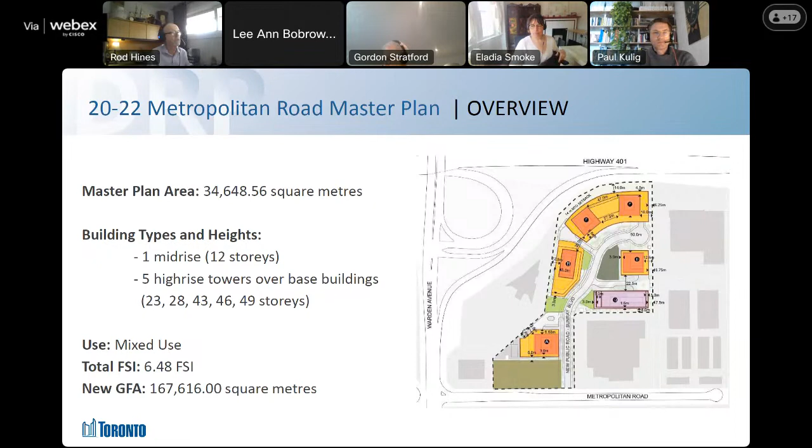The subject site is currently designated mixed-use in the official plan. Next, please.

The subject site is currently designated mixed-use areas. It is the entirety of the red space highlighted on the diagram. It's kind of an unusual context, flanked by general employment areas on the west side and to the south, and core employment areas immediately to the east and southeast.

A little bit of background: we had a prior application, an official plan amendment only application on these lands by a prior owner back in 2013. Although city planning staff did not support the redesignation to mixed-use areas at that time, City Council saw fit to redesignate these lands to mixed-use areas through the municipal comprehensive review process concluded in 2013, implemented through Official Plan Amendment 231.

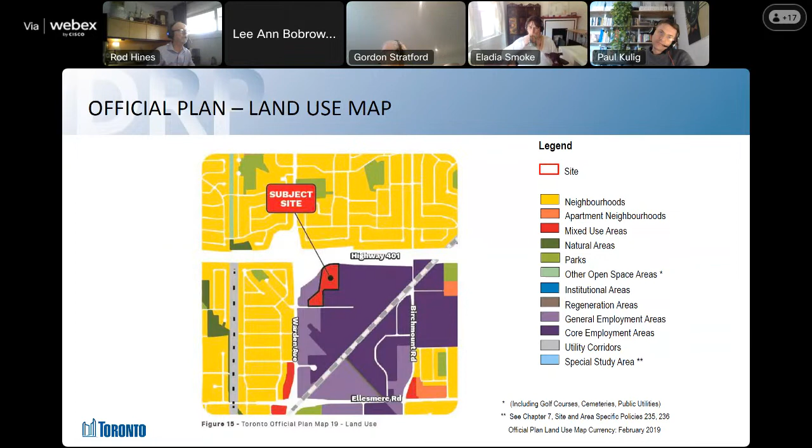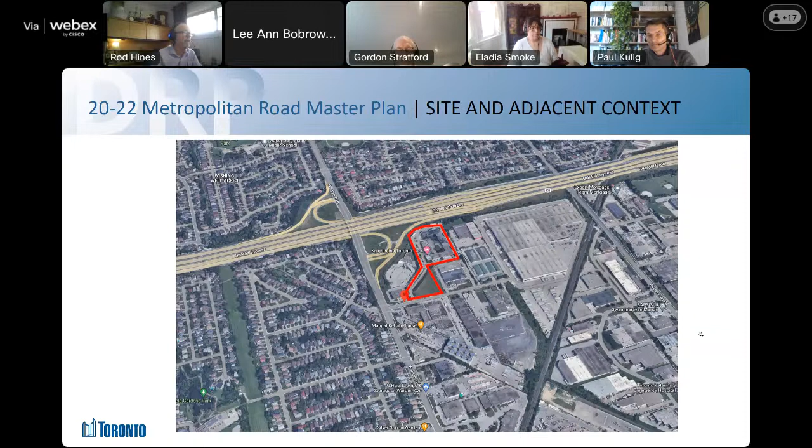This is just a little closer in aerial photo. On the north portion of the property is an existing aging hotel facility, there for many decades, with a driveway access running down to Metropolitan Road. The balance of the frontage on Metropolitan Road is an expanse of currently vacant land. Again, I've pointed out the Salvation Army and the Toronto Chinese Methodist Church, and some of the names indicated on this photo will give you a sense of other primarily industrial operations in the immediate vicinity.

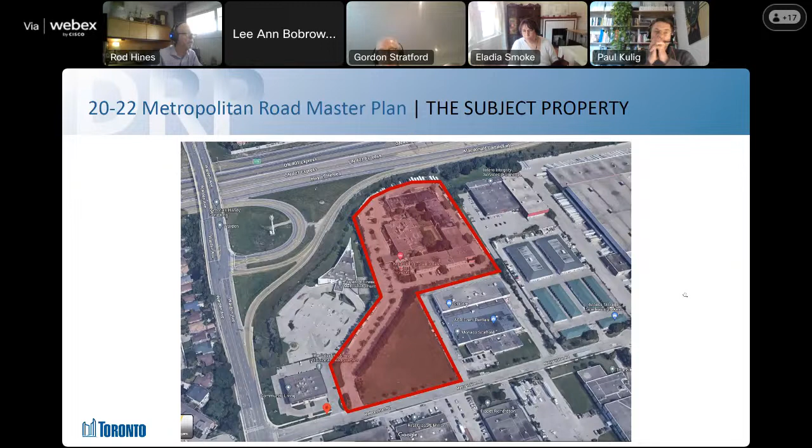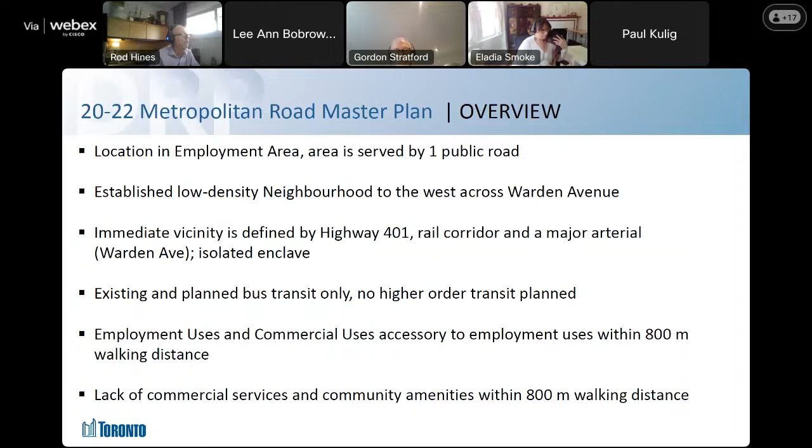Next slide, please. Thank you. Next slide, please.

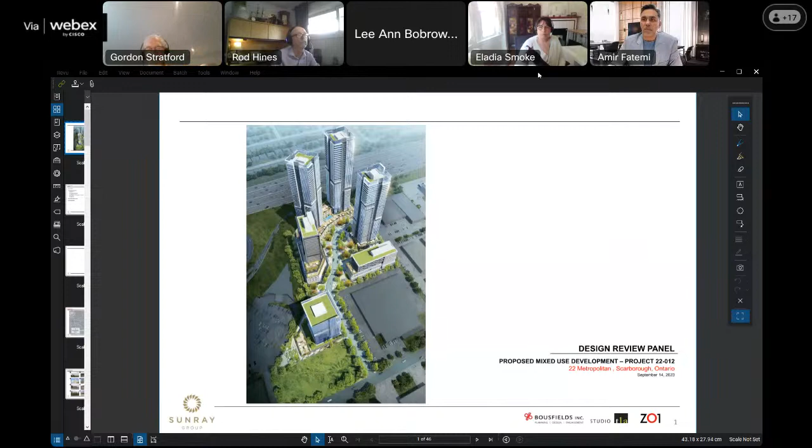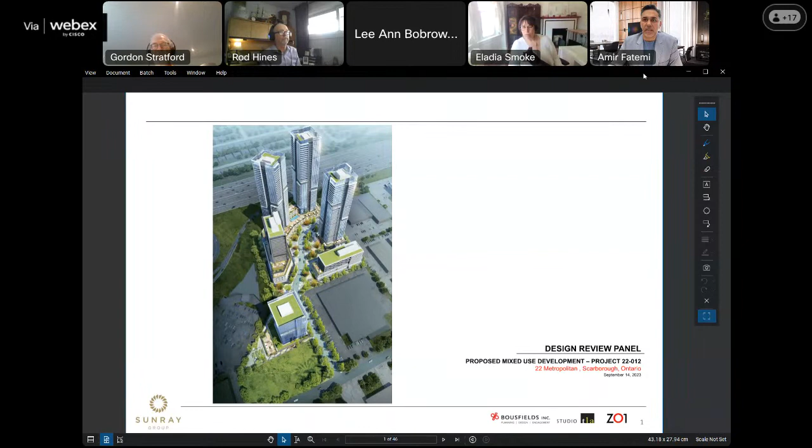Hello, is somebody presenting? Bonnie from our team is presenting. Oh great, thank you. Bonnie, I think you're on mute. She dropped off. Derek, are you presenting? The presentation. Bonnie, we cannot hear you. Can you hear me all right now? Yeah, we can hear you. Okay, so I'll begin the 15 minutes now, well, as soon as the presentation's up on the screen. Okay great, the floor is yours.

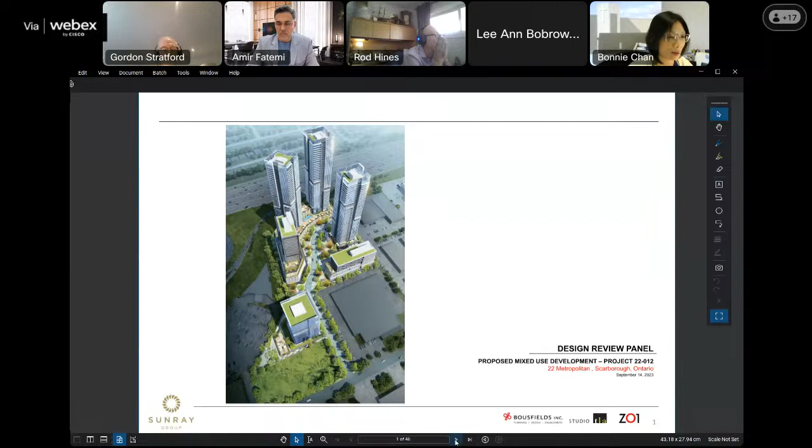Good afternoon, this is Bonnie Chan from Settle & Architects. The agenda has two parts. We'll first describe the March submission on the Metropolitan proposal, and we'll present a revised site strategy scheme based on the city comments that we received in August.

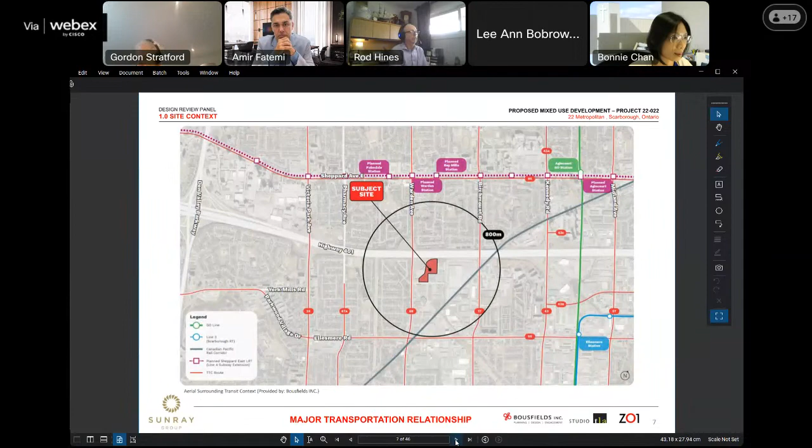This is a various site context plan on the proposed development: transportation network, land use, site views, block context plan, and axonometric.

Going back to the proposed development, this slide shows our thinking process behind organizing the site through the road network in 5 different development phases, based on uses and distribution of major public realm and open space, the locations of private roads and the new public road, and how it develops into street-related built form.

This is a color site plan we submitted in March. The proposed mixed-use community at 22 Metropolitan Road consists of new condominiums and rental and street-related retail use, senior housing, office space, and a new hotel.

The proposed development introduces a new public road called Sunray Boulevard that acts as a landscape spine to the mixed-use 5-tower and 1 mid-rise scheme, coupled with a central localized POPS and a new public park located along the gateway entrance fronting onto Metropolitan Road.

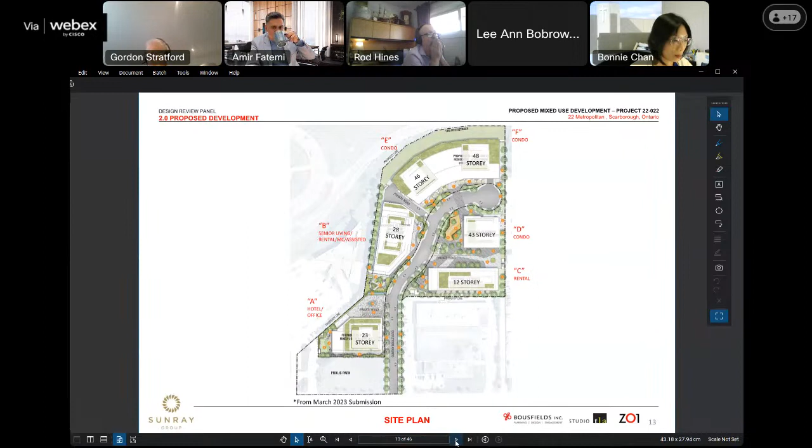The slide shows the phasing plan and location of different outdoor spaces at and above grade, featuring a public park, POPS, and various semi-public and public open spaces along Sunray Boulevard.

The slide shows the intended activated frontage, such as retail and entrances, along Sunray Boulevard and the surrounding edges of the public park and POPS, which result in the diagram on the right showing the pedestrian circulation pattern.

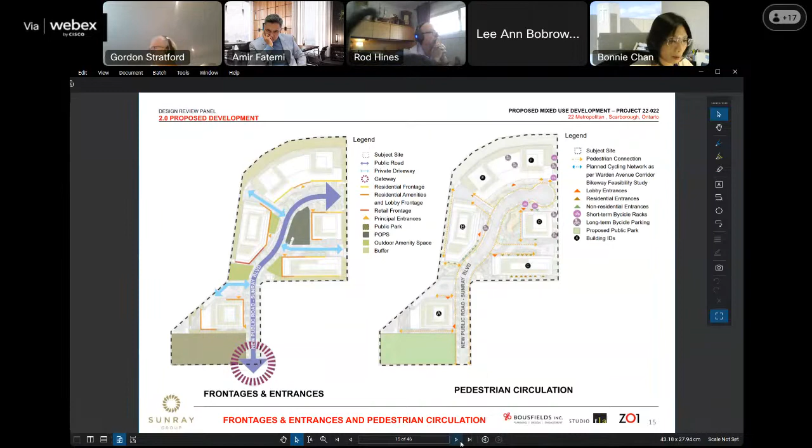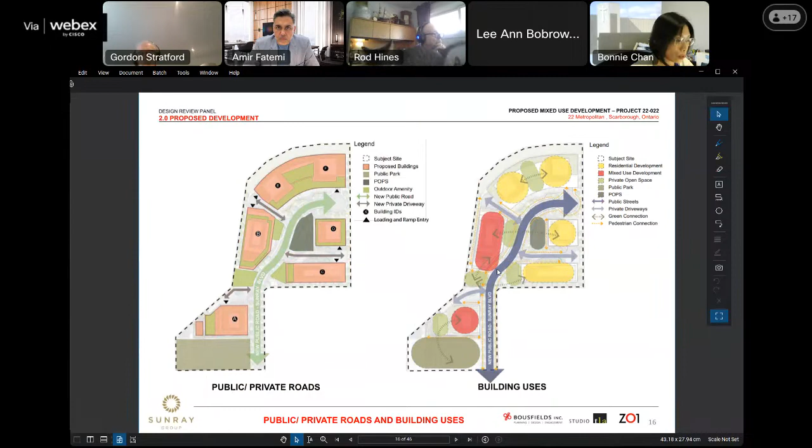The slide shows how the 3 private roads lead to the loading and parking entry for different blocks at the rear, away from the public street. To the right, it shows how the building uses relate to the proposed private and public outdoor recreational areas on various levels.

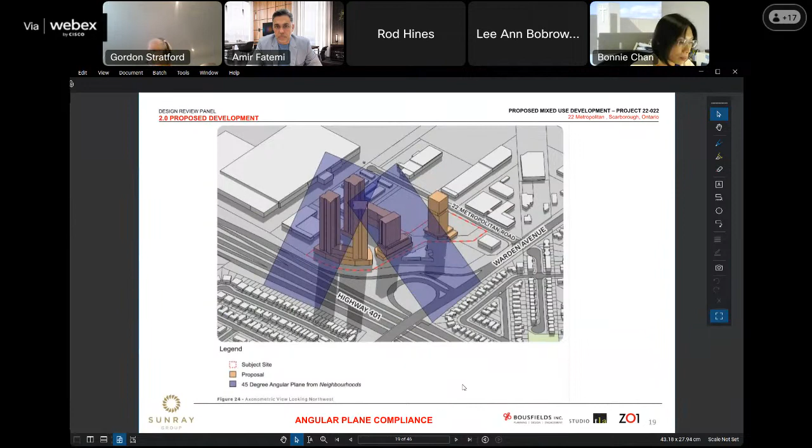The diagram shows a 45 degree angular plane compliance from the residential neighborhood.

Moving north along Sunray Boulevard into the feature POPS area, it shows how the different lobbies, retail, amenity drop-offs, and grade-related patios relate to the different edges of the POPS and the various public spaces, like the Healing Garden and various forecourts along the public street. Again, the service functions are internalized at the rear, away from public view.

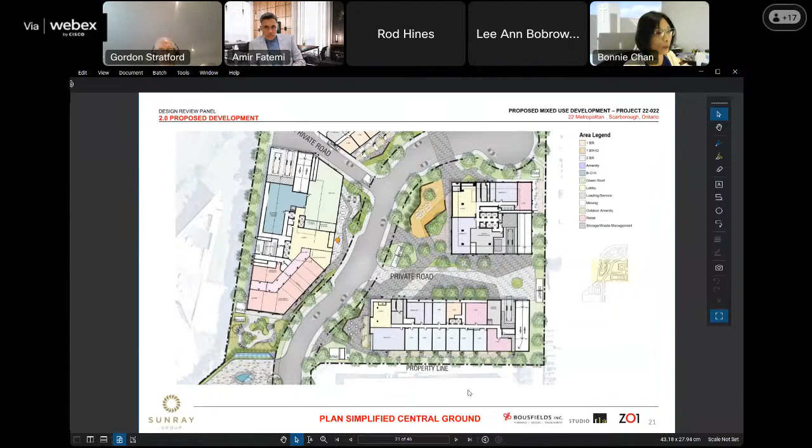Similarly, at the rear, the focus on the pedestrian experience becomes more residential, with a widened crosswalk across the street to the POPS. A potential extension of Sunray Boulevard to the east is anticipated, should the block to the east be redeveloped in the future.

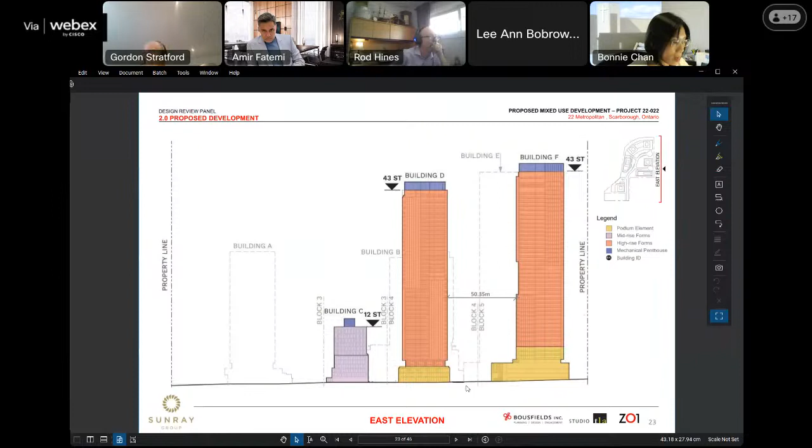This is an east elevation showing the space between the rental and condo transitioning from the podium down the street. This is the west elevation showing the tower and podium transition at the condo, senior rental, and hotel office complex.

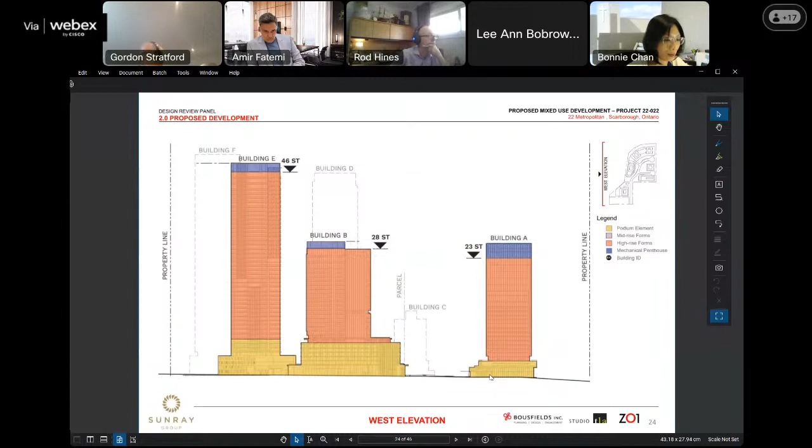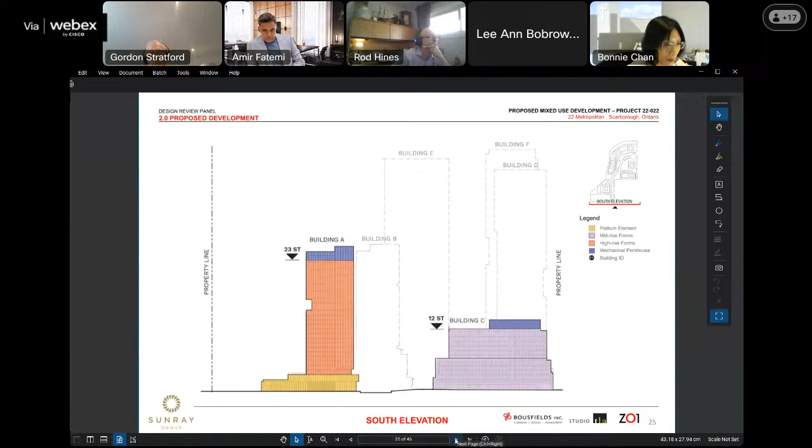An overview of the development. This is our vision of the community along Metropolitan Road. We have incorporated a variety of architectural materials to create an interesting, cohesive, sheltered, and comfortable pedestrian experience at grade, and the design is intended to provide a strong identity at the Sunray Boulevard frontage.

Podiums are designed to provide a consistent street edge with appropriate setbacks, podium height responding to human scale, and lower and tower setbacks.

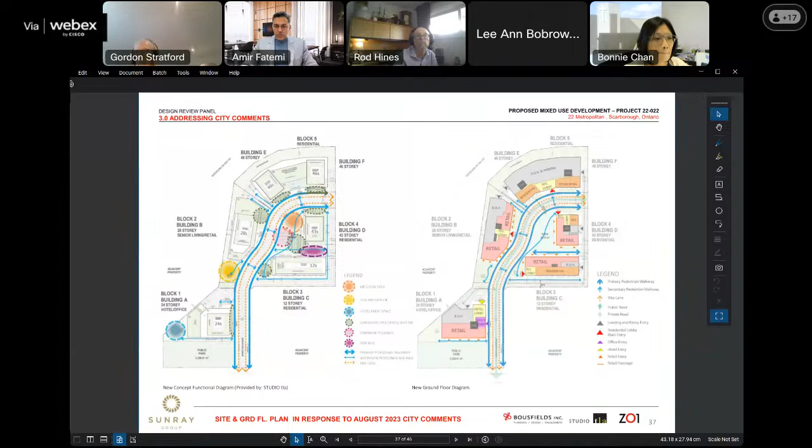Thanks, Bonnie. Can we go to the next slide, please? So, Bonnie, I think you've covered a lot of the public realm experience at grade. Thank you very much for that. I'm going to quickly go through the last 10 slides with some precedent imagery here.

As Bonnie alluded to, there's quite a heavy residential feel here at grade level, and that's what we want to depict as we go from south to north. Granted that there's a hotel on the way from south to north.

I want to draw attention to the very generous setbacks that have been provided, bearing in mind we are looking at the previous submission already submitted in March. I want to draw your attention to the very generous setbacks to the podiums, which Bonnie mentioned give very generous spaces for lots of tree planting and lots of open space, passive and active recreation.

If we go to the next slide, please.

Some of the movement through the site is divided into major pedestrian circulation on the sidewalk, and as we heard before, it's a typical 18.5 meter right of way with generous sidewalks up either side of that street. Then you have minor pedestrian circulation through the open spaces, again alluding to those setbacks that vary as a minimum of 3 meters and open up to 13-15 meters in some spaces across the POPs.

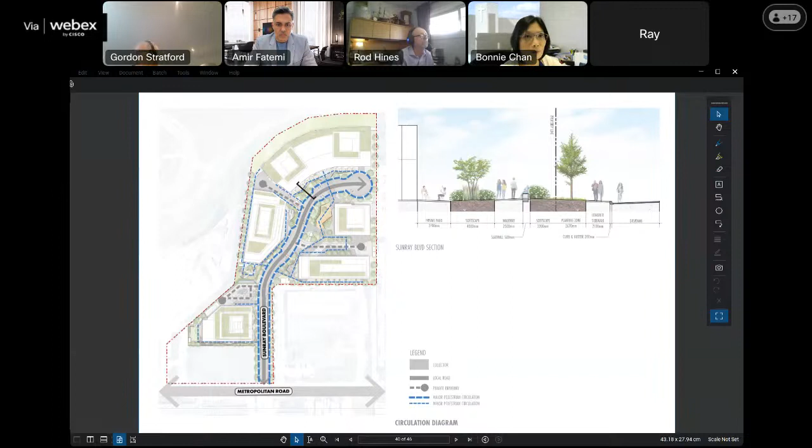Sorry, I lost the slide for some reason. Don't worry, it's fine - only a couple left anyway. Oh, it's not loading. Great.

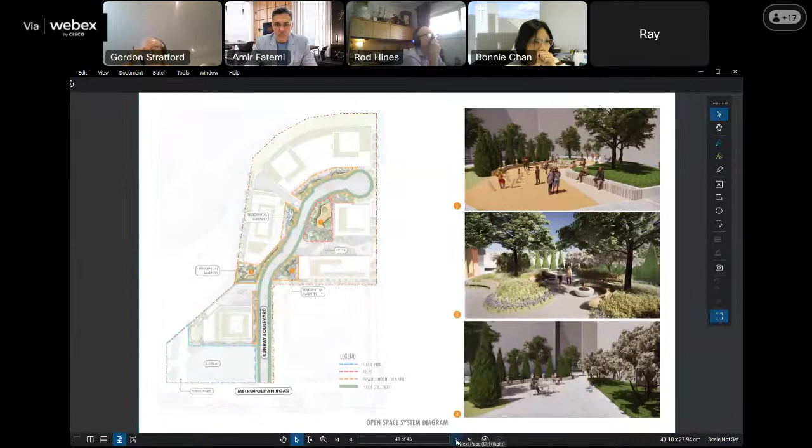There you go. We've highlighted the open spaces here, with 3D imagery showing potential programming, starting from the healing garden in the middle image, and potential programming including recreational play spaces, seating areas, communal areas for residents, and some hotel ground floor uses alluded to in the previous presentation. If we go to the next slide.

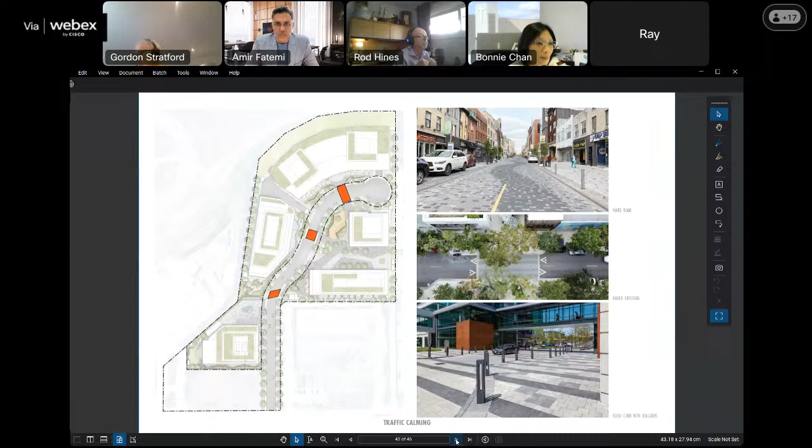Some of the efforts from a traffic calming perspective that we're thinking through as we go forward, and we want to get in discussions with the city on this - fairly atypical arrangements we're starting to see all over the city, paved crosswalks, raised tables for traffic calming effect, because of the residential feel we want to portray here. We think these are critical, and we're really looking for the city to get involved and drive these concepts forward with us as we go through the process. Next slide.

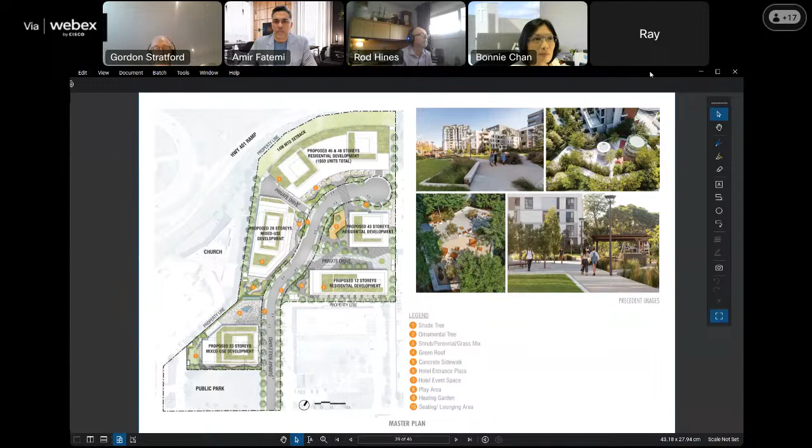I have maybe three questions. The first may not be fair to city staff, but I find this project very puzzling - this isolated pocket of incredibly high density in the middle of an employment area. What was City Council thinking when they approved the change to mixed use against staff recommendations? I imagine there was something behind that approval, and I'd like to understand - was City Council assuming this employment area is all going to transform? What's the big idea here that one could position this application in some future planning context?

I'm missing that. The second question is, what is the closest high order transit station to this site? How far away is it, and where is it located? And the third, to the applicant - why is the public park located at the south on Metropolitan Road and not in the heart of the community, to benefit the residents in a more direct way? Thank you.

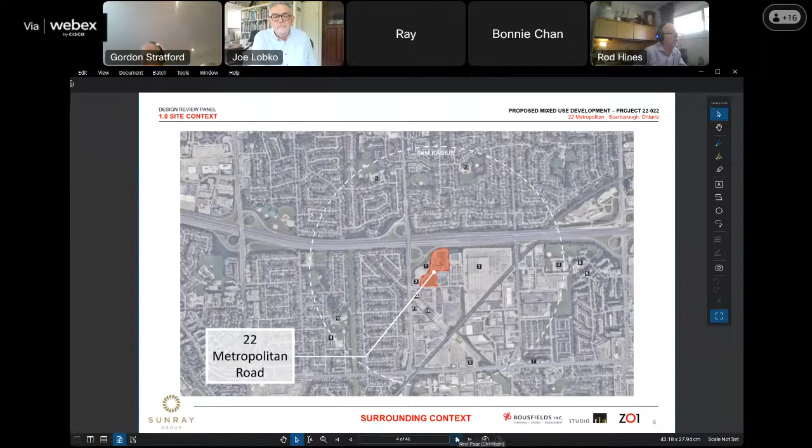It's difficult to really know what was in council's mind back in 2013, but my recollection of the proceeding at Planning and Growth Management Committee, as it was called at that time, is that it was motivated by the councillor of the day, who was quite excited to hear the original proposal included replacement of an aging hotel facility, which he thought would be a great boon for the city to have the site redeveloped with a new hotel as a means of providing some level of employment replacement.

There was also an understanding and a requirement, as reflected in site and area specific policy 458 that I mentioned, that there would be in excess of 11,000 square meters of office, retail, and other business uses introduced to the site. That never proceeded through any kind of zoning approval process, but there was the expectation in that concept that there would be significant employment replacement, and council was content in its mind to also entertain the residential proposals at that time.

Those residential proposals were significantly less than what we're seeing here. There were only 877 units proposed at that time, and about just under 70,000 square meters of residential use, significantly below the numbers we're seeing today.

In terms of higher order transit, of course, we have that indicated on the slide up on Sheppard Avenue. So we're close to, well, not terribly close to, the terminus of the Scarborough subway, but the city certainly has plans to upgrade LRT service ultimately along Sheppard Avenue. That's many years down the road.

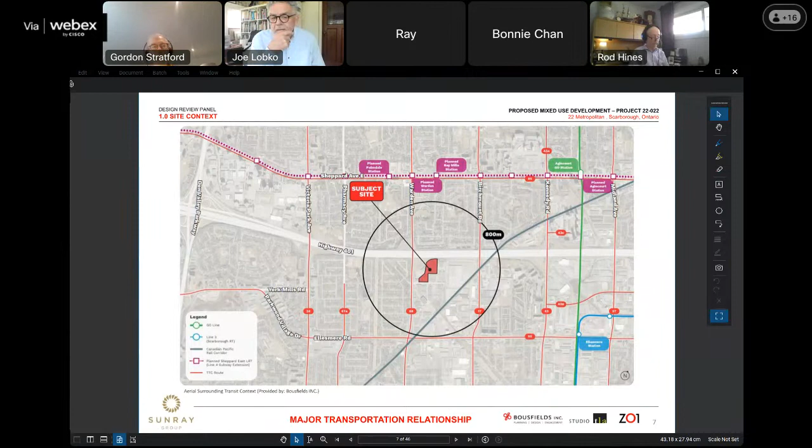Okay, Joe, does that answer your questions? No, sorry. The final question to the applicant was about the logic of the public park being away from all the density along Metropolitan Road, beside the existing employment uses. Okay, right. And who can answer that?

I can maybe comment on that one. From our original consultations and pre-consultations with the city before we put an application together, we actually had the park where that 12-story apartment is now. Then through consultation, city staff requested the park be closer to Metropolitan for public access to the park for future developments in the area on the south, east, and west sides, so people would have access to the park. That's why we moved the park to the south, based on the city staff's comment. Okay, thank you.

Joe, any other questions? We'll move on. Okay, we're going to move on to Heather, then Lydia, and then Michael. Heather, over to you. Yeah, thank you.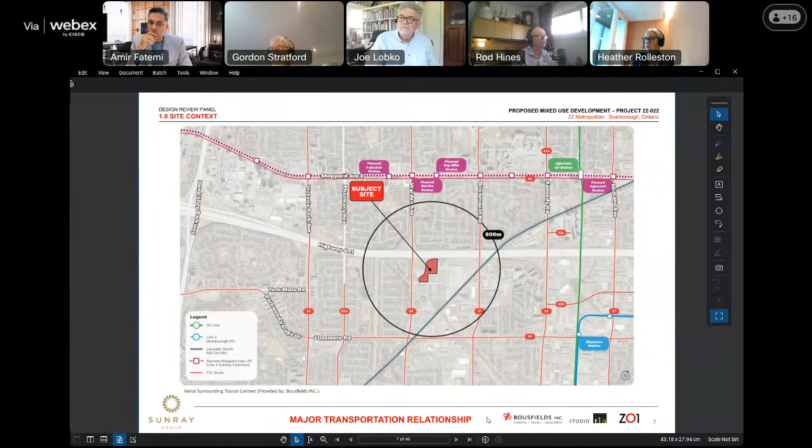I'm just confirming that on page 34, addressing city comments, that all of those revisions have been made on the right-hand side. So the former programming for the buffet and multi-purpose hall is no longer at the ground floor of building 1, and there's now retail instead. Correct. And so something like the dog run shown on the left is no longer there on the right? The dog run is going to be relocated and readjusted by the landscape architect, but it's still within the plans. Okay, okay.

And then your building A is office and hotel. I'm just wondering, when you look at the architectural expression, there's a kind of very transparent interruption about halfway up the tower. Just wondering if you could let us know what kind of programming is in that. Is that where the separation between office and hotel happens, or what is that about? Correct, this is actually a sky lounge. Originally, in consultation with our developer clients, this is going to be an amenity given to the hotel and the office, so it's an indoor mingling floor for the different uses within the same building. And to answer your question, Heather, yes, that is a separation—hotel ends there, and then there's five floors of office on top of that.

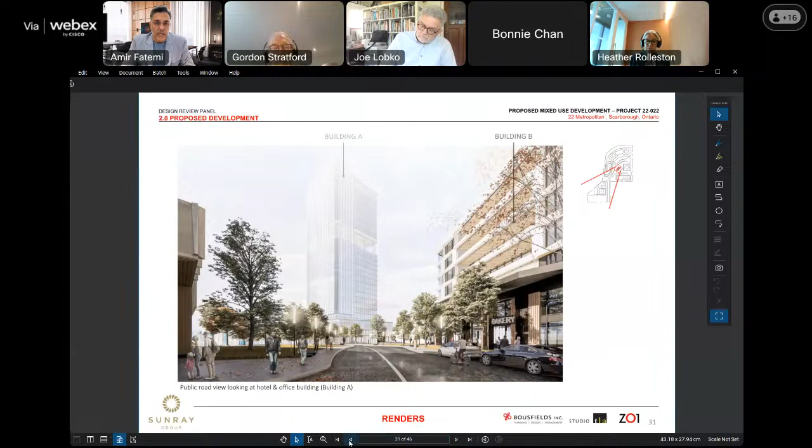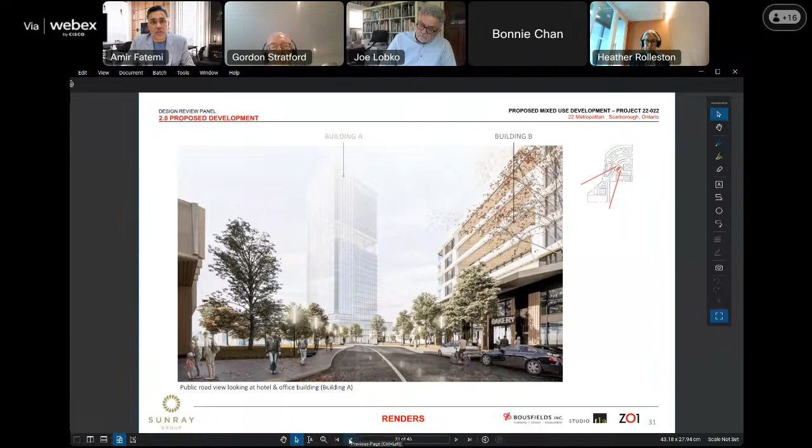We own multiple hotels within short distance from this drive and offices, and based on the capacity, we thought that this was reasonable size. We've increased the amount of retail at the base of these buildings based on the new design shown on page 34, and we also have a retirement home which comes with 8 stories of extended care and assisted living.

And then we have the independent living above that, which is a senior rental building, but really with full services from the assisted living section. The inclusion of a rental building, we thought, is a good mix for the area. That's where the discussion is with the city, how we can mix it up that benefits everyone. As far as the office space, we all know that office space is not as popular these days, and we don't want buildings sitting empty with no one leasing them. We felt like this is a nice complete sense of community with the retirement home and the hotel.

We do have 5 stories of office space on top, with one of the floors designated as shared office space, so people can rent space. We assume people that live in those condos, if they want a small space, the accountants, the architects, and startups, they can just rent that shared space from us. And then, of course, we increased the retail at the bottom. So I think the numbers are higher than the original package we submitted, based on these revisions in the past few weeks.

I'm not sure where the exact numbers are at. Okay, great, thank you for that. Thanks, everybody. We're going to move on then to Eladia, then Michael and Paul.

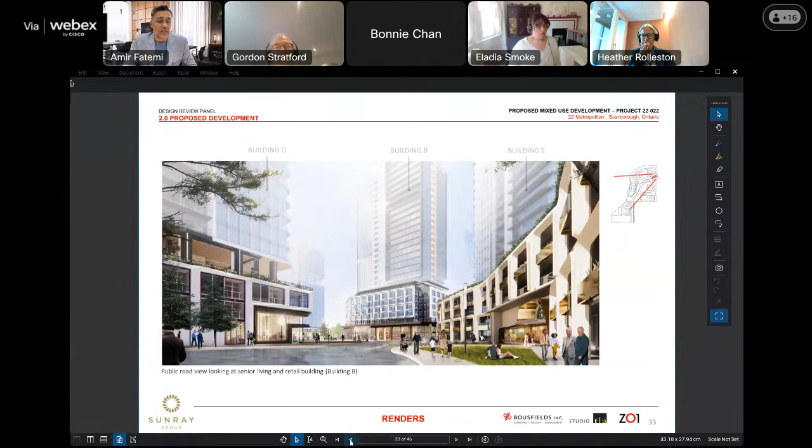Curious about, I think 3 questions, but they're fast. Is the public park going to remain mowed lawn? As in like real grass, you mean? Right now it's mowed lawn with a scattering of trees. Is that pretty much how it's presented to remain in this development?

Are there any plans for the public park to be anything other than just a mowed strip of empty lawn? So is this a question to the city staff? I guess it's given over to public use, so the public would have to develop it. There's nothing that this development is proposing to do with it other than leave it empty.

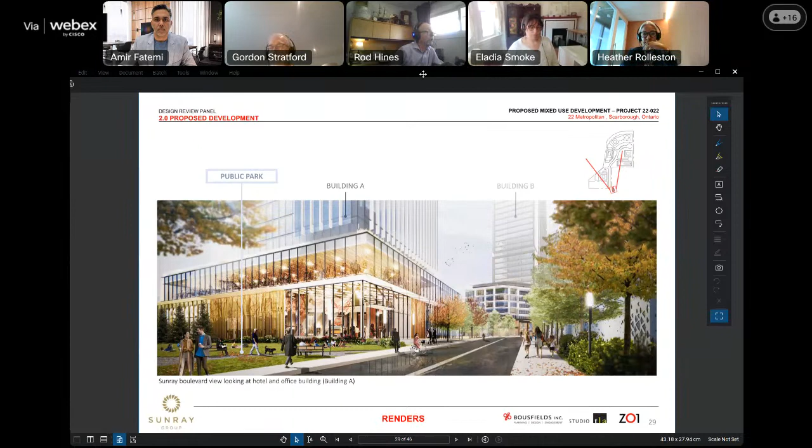Okay, Rod, would you be able to provide some input on this? Well, a lot of that will be determined through the zoning and particularly the subdivision process. The city's expectation with any subdivision would be at minimum that the lands be delivered in base park condition, basically sodded with servicing installed, including water service to the park, et cetera. That's typically going to be a requirement prior to first above-grade permit or first occupancy of one of the buildings. We're simply not there yet in the process. In terms of getting to above-base park improvements, that's a further negotiation we would have with the owner through the rezoning process, to see if those could be incorporated as in-kind contributions to their obligations, because we can no longer apply Section 37 to secure those kinds of improvements. We simply haven't had that level of discussion yet with the applicant.

And if I may add a comment, Rod, if you don't mind—we are planning on moving our actual head office to that office building. So we have great interest, and we're going to have our flagship hotel in that space, and we're going to own that retirement home and the rental building there. So we do have great interest in having a nice park beside our hotel and head office, and definitely for the project as a whole. So we'll work with the city on that to see how that will come about. Thank you. Okay, thank you.

Okay, I have a question. There's a lack of clarity about what's retail and what's not on the ground level. For example, on one slide, it shows a 3-bedroom coded pink for retail. So I'm really not clear what's intended for the retail uses. Is there any sort of logic to how they're sprinkled about the development?

So in terms of the retail, I'll refer to the last slide based on the city's comments, and how we relocate all the retail at grade. Starting with the hotel portion, we're having retail like we talked about, cafes and patios fronting onto the public park, with some areas for hotel and office lobby at grade. There will be two checks at the base of the senior rental where there will be retail hugging along Sunray Boulevard. We're also planning to introduce, around the POPs area where there used to be amenity spaces at grade, neighborhood retail to strengthen and enlarge the POPs area by offering retail on the north side of the rental building at grade.

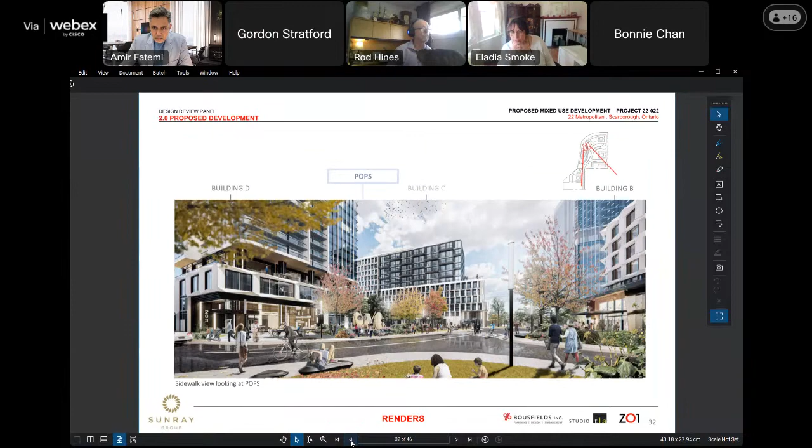Okay, just to confirm, slide 18 is the one that confused me because it seemed to be showing another level. So this slide is more accurate? Slide 34 is the revision, Eladia, revised as per the city's comments. So slide 18 is obsolete? That's right, it's the one on the right though. This is the newer one we're proposing. Does that answer your question, Eladia? Yes, thank you. Okay, great.

Michael, and then Paul. Thanks, Mr. Chair. I think it's a question for the proponent - there are quite a few buildings and quite a few different street conditions.

I wondered - is there an intent to have a clear set of principles that would guide the development so that this public street is a complete street, with a recognizable continuity of materiality, planting, and built form? I know you've indicated some street sections, but those don't necessarily represent the vast opportunities here. So is that still being planned, or is what we're seeing the result of a strategy that hasn't been articulated in the document?

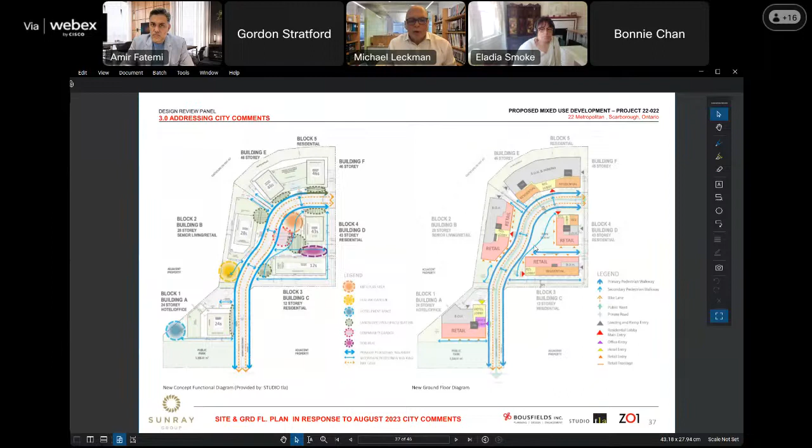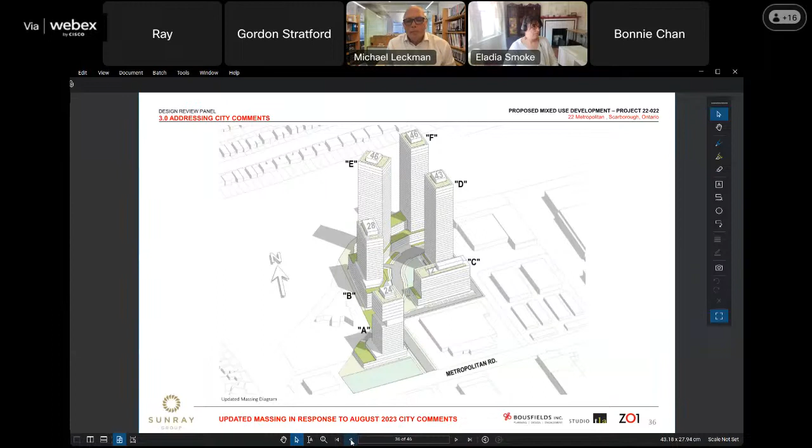I'll jump in there, Bonnie, from a landscape perspective, Michael, to clarify the materiality and planting questions. As you're probably aware, there's a new model of public realm design coming out of the city through workshops, and we're happy to work through future submissions during those workshops about what exactly happens on the public ground. This is a site organization diagram, not particularly a street design diagram. For too long city streets have followed one standard design, and we welcome those workshops that will likely happen with the city about experimenting with a different vision for streets in Toronto in terms of detailing and materiality. So yes, this is not a streetscape design, but that will be fleshed out through the process.

If it's okay, Mr. Chair, one last question - the road terminates at a roundabout, a turnaround. Since the lands to the east are not likely to be developed anytime soon, was there any consideration of creating a focal point of some kind, or a termination at that location?

With the revised road network presenting on screen, we're going to introduce a linkway at the end here to make it a loop street. This area here will be some sort of termination, subject to discussion with the developer and the landscape architect with the city to come up with something attractive until the interim condition is transformed when the next door neighborhood is developed.

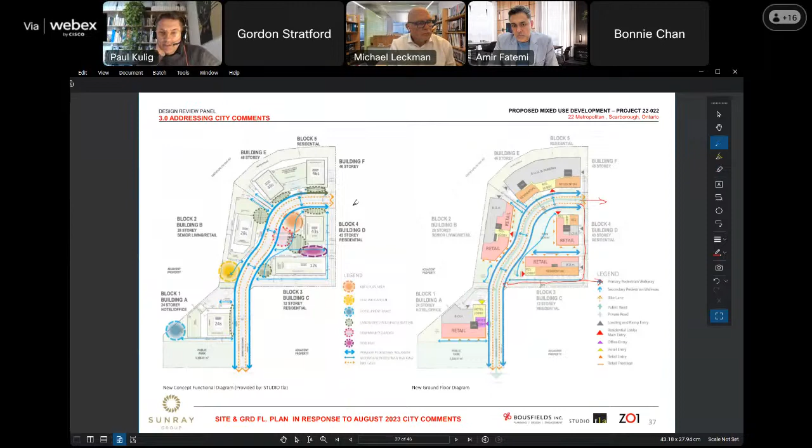Yeah, I'm wondering if you could flip to, I think it's slide 39, just a couple down here. I'm curious, similar to Eladia's point, about understanding some of the ground floor changes. It's further down, one of the ones that showed screening and grade changes. I think it was 39. Yeah, that one, there we go.

Could you just clarify what's happening along the edge of the hotel parcel in particular? There's showing a grade change, could you describe what that is? Which part is higher versus lower? What does a 2.4 meter windscreen look like right opposite, immediately south of the building, but then in front of the hotel? And then the triangular piece of the park that's variously shown as a park, but also as an event space, if you could just clarify what the intent is there. So that's the piece on the northwest of the park, I guess. Thank you.

I just addressed the windscreen. Your question was, what does the windscreen look like? A 2.4 meter high windscreen, what it looks like? Just clarify that, Paul, more specifically what it would look like maybe 2-3 meters from the hotel facade up against a park, what the intent is there, because I've also seen that described as retail. I think we're just lacking clarity around that edge of park hotel interface.

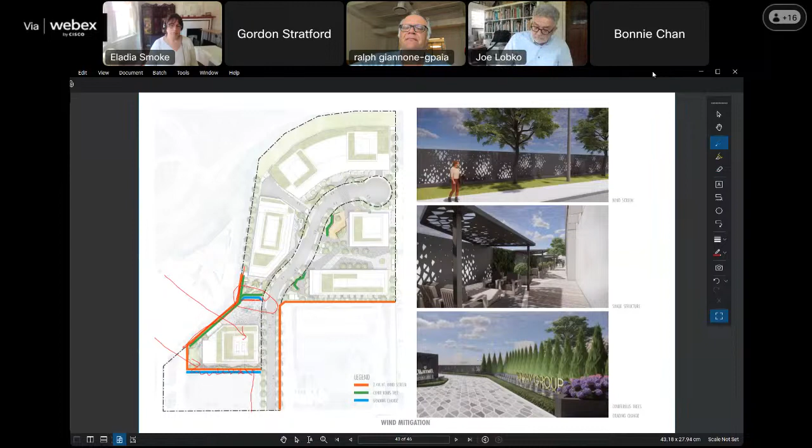Gordon, it's Ralph. Just a question for you. Is this an OP rezoning? I just forgot. Somebody, I understand that it's OPA. Okay, and Rod Hines can provide more information if necessary, but I think that's what I understand it is specifically at this point. Currently, it's just an OPA.

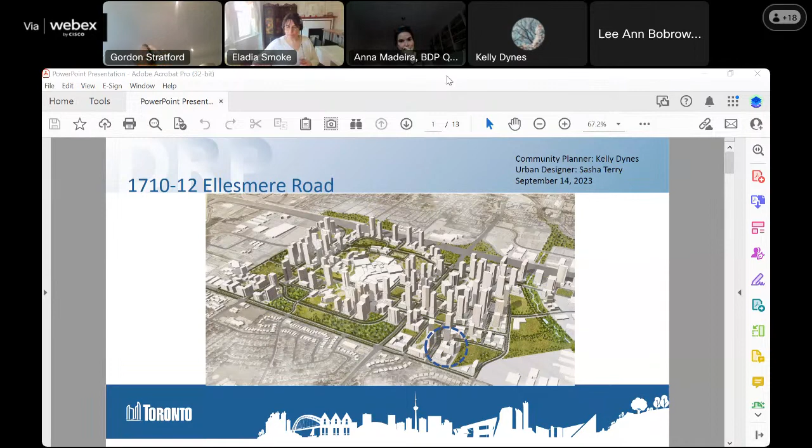Sorry, my slides don't seem to be working. Oh, there we go. We're here today to discuss the redevelopment of 1710 to 1712 Ellesmere Road, outlined in red on the map. The site is roughly 1.88 hectares with 75 meters of frontage on Ellesmere and 225 meters of frontage on Grangeway Avenue. It's currently operated by Community Living Toronto, an organization that supports those living with developmental disabilities.

Couple of points of interest on the map. Number 3, the big blue square, is the future site of the Scarborough Centre subway station, bus terminal, and transit-oriented development. Abutting the site to the east is a TTC maintenance facility, and the blue hatch lines along both Ellesmere Road and Grangeway Avenue illustrate the future route of the Durham-Scarborough BRT.

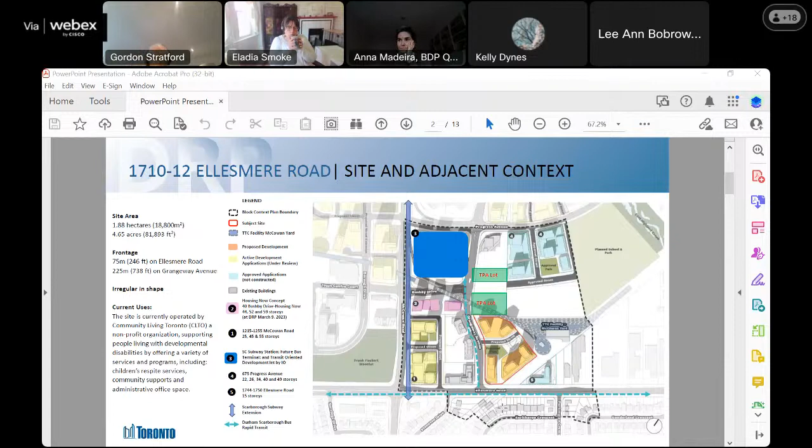The 3D model illustrates the emerging built form context in the immediate area, in part supported by the future Scarborough Centre subway station, which is planned to open in 2030-2031. Transit-oriented development is expected to also occur above the subway station and bus terminal.

The Scarborough Town Centre Mall Master Plan is highlighted in yellow, and the project 1235 to 55 McCowan Road is highlighted in orange. Just to the north of that project in blue is the 40 Bushby site, the Housing Now project.

An OPA rezoning and draft plan of subdivision along with 3 site plan applications were submitted in June of this year. The proposal is for 5 towers, 2 at 49 stories and 1 at 53, 45, and 28 stories.

While the applicant will review the proposal in detail in their presentation, I thought it important to highlight a few key points as we move forward. First, the tower floor plates being proposed appear to exceed the 750 square meters that we like, and additional clarity is being sought in the site statistics package received.

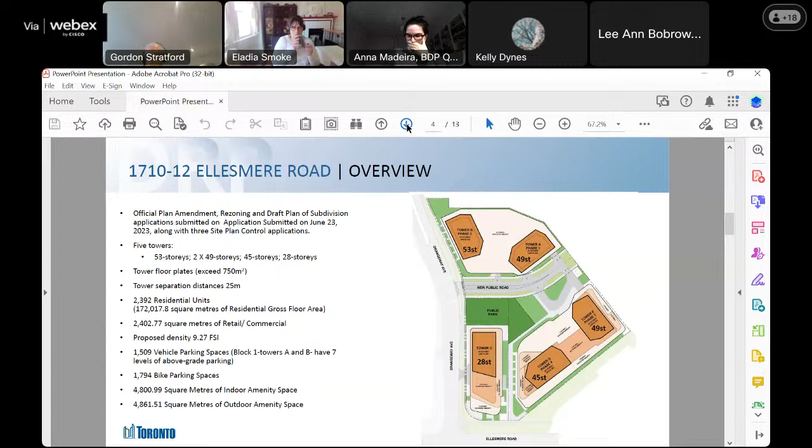Current tower separation distances are 25 meters, whereas emerging directions from the Scarborough Centre secondary plan study recommend a minimum of 30 meters. The north block, where you see the 53 and 49 story towers, includes 7 levels of unwrapped above-grade parking. And the submitted wind analysis demonstrates that wind safety criteria have been exceeded in 20 different sensor locations within the site and development.

So just to highlight a few planning policies, the site's located in Scarborough Centre on the urban structure map 2. Centers are places with excellent transit accessibility, and they're also places that we expect to absorb population and employment growth outside of the downtown core over the next 30 plus years.

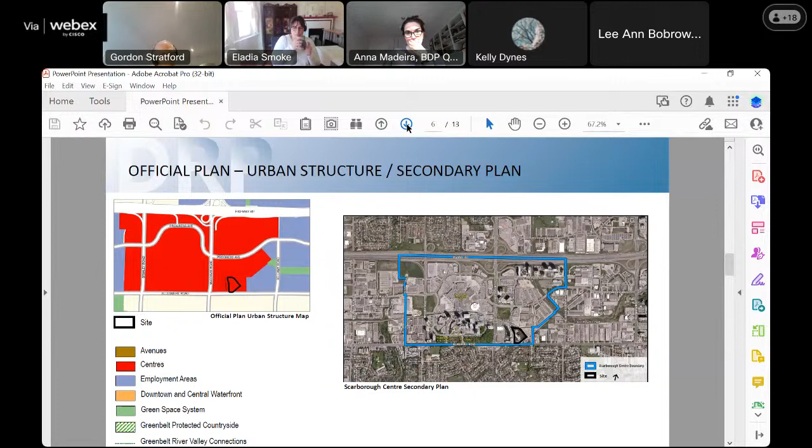The site's also located within mixed use areas on the land use map, which allow for a variety of uses, including residential uses. The scale and density in these particular areas are directly related to the area context and existing and emerging policies. We expect that new buildings frame streets, minimize shadow impacts, and transition toward lower scale areas.

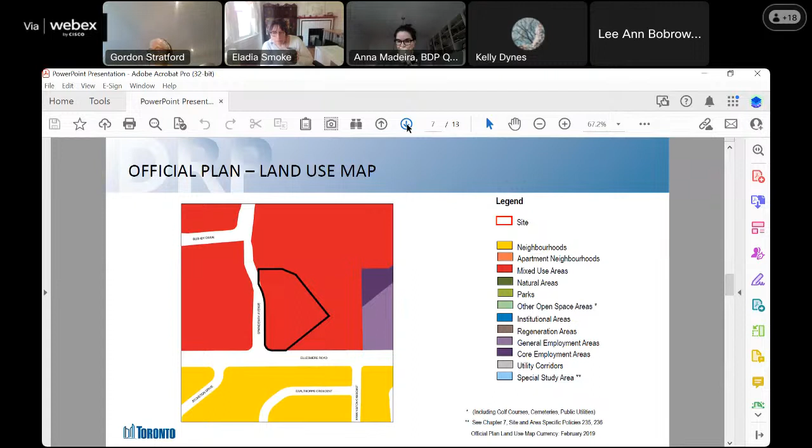The site is zoned institutional in the employment district zoning bylaw. Residential uses are not permitted.

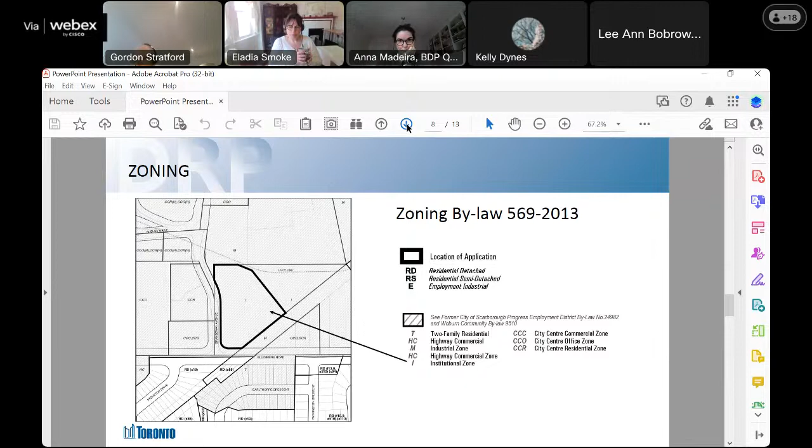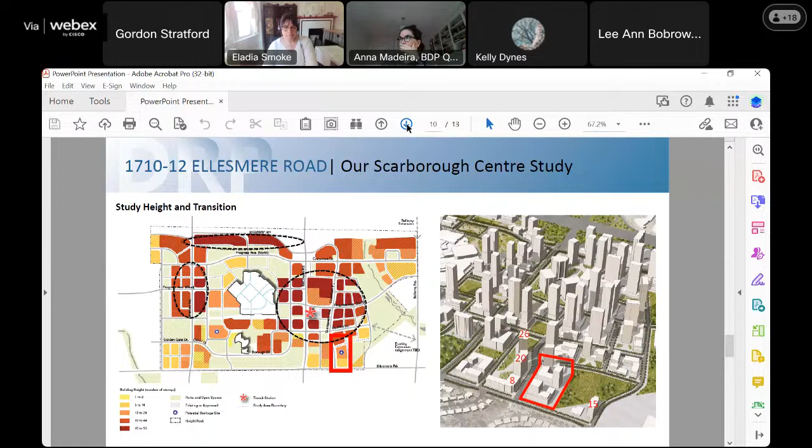The Scarborough Center secondary plan study is wrapping up, with expected completion early in 2024. The study will include a planning framework that will guide future development within the center, along with urban design guidelines. So the issues we wanted to bring forward for the panel's advice and input include the design of the building, particularly podium coverage, podium setbacks, above grade parking, and street and parkland animation, as well as tower floor plate and separation distances. The second main area of focus is tower height and transition in relation to the height peaks within the emerging directions of the study.

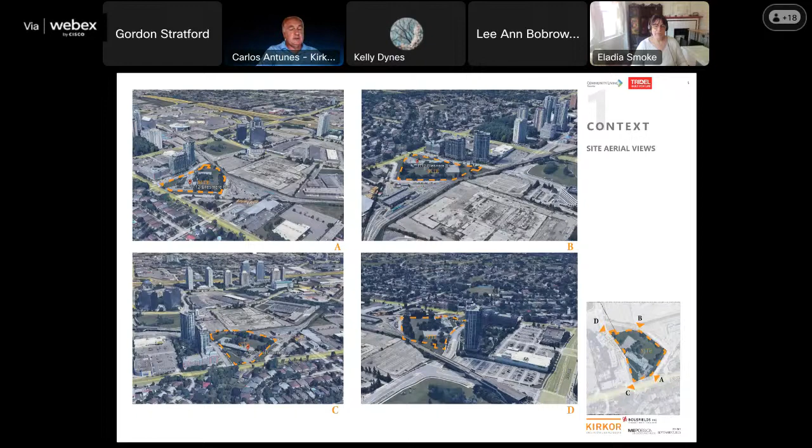These views identify the site and its relationship to the abutting lands. The following views indicate the current nature of the site and its adjacency to the TTC yard.

The site is well located to nearby transit, public services, and retail services. It has immediate proximity to existing public transit nodes and planned transit extensions. The existing condition offers the McCowan RT station and the TTC and GO bus terminal station to the west. At this time, there are 2 planned transit lines to serve this community: the Durham-Scarborough BRT route, and the Scarborough subway extension. The site is also well situated near green areas, employment areas, and is an extension to the Scarborough mixed-use redevelopment area identified here in orange.

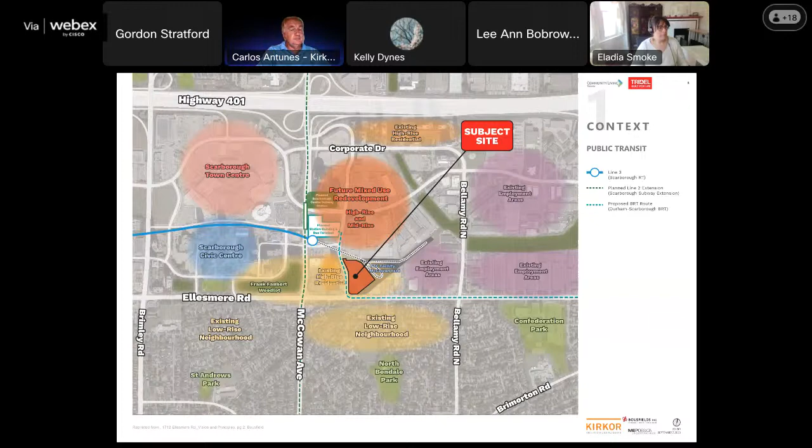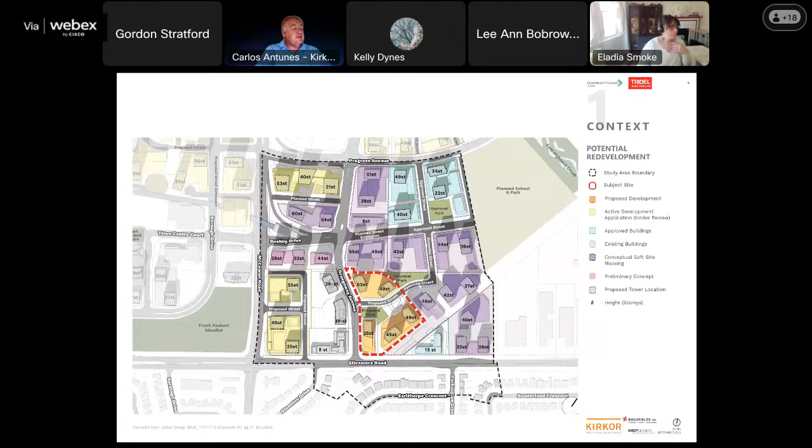The proposed site massing was prepared in accordance with the official plan policies, Scarborough Center Secondary Plan, and the McCowan Precinct Urban Design Guidelines. The conceptual massing has been prepared to reflect a number of contextual considerations, including the size and depth of the site, proximity to existing and planned transit, surrounding built form, and our preliminary analysis of shadow impact and proximity to the neighborhoods.

The master plan structure is rooted in CLTO's vision to address their community's needs of welcome, stay, and flow. The redevelopment of the site provides a unique opportunity to establish an inclusive community in Toronto. The proposed master plan provides a mix of uses, a mix of housing options with affordable and market housing, new public spaces, community services, and non-residential uses.

The guiding principles and key elements are as follows: establish an inclusive and accessible community with a strong sense of place; connect and engage by encouraging all modes of movement; reinforce the site's significance as a southern entry into Scarborough Centre; provide a mix of housing types and tenures, including affordable and market units; animate and cultivate a sense of place; create compatible development with appropriate transitions; prioritize high quality and affordable design of spaces and promote excellence in architecture and landscape design; and integrate innovation and sustainable design approaches.

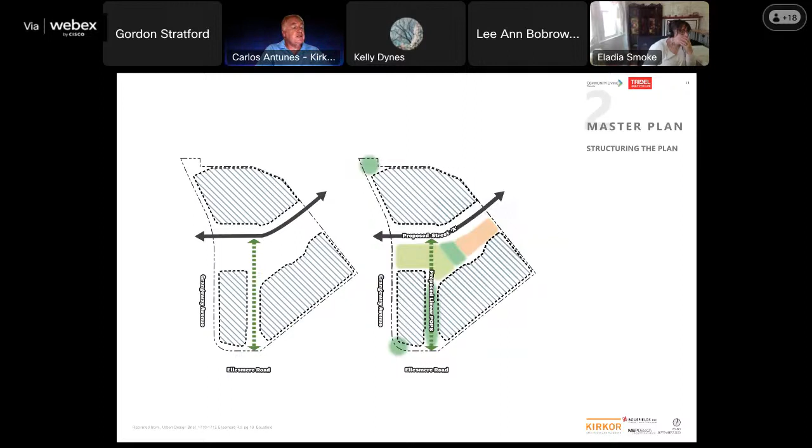The site is organized into 3 blocks that front the new east-west public road, Public Road A, and the new park, along with 4 anchoring POP areas. The plan prioritizes the pedestrian experience and provides opportunities for passive and active recreation through a well-connected network of open spaces. These spaces will not only improve pedestrian movement but also promote a healthy lifestyle by encouraging transit use, cycling, walking, and fostering interaction throughout the site.

The master plan is organized into 3 blocks. Block 1 has 2 residential towers of 53 and 49 stories, 1,060 units, 797 bicycle spaces, an amenity ratio of 2 square meters per unit, and a parking ratio of 0.65, for a total of 706 parking spaces.

Block 2 has 2 residential towers, 49 and 45 stories, 1,052 units, 790 bicycle spaces, an amenity ratio of 2 square meters, and a parking ratio of 0.65, for a total of 684 parking spaces.

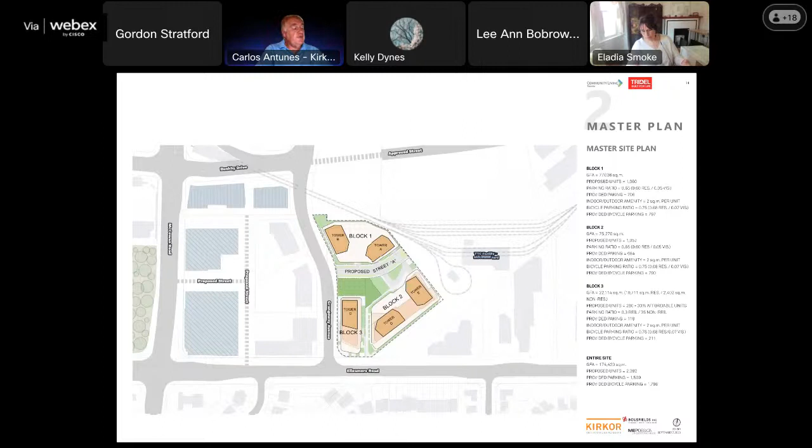Block 3, the tower you see there, is the CLTO building: 1 residential building, 28 stories, 280 units, of which 30% are affordable, 211 bicycle spaces, an amenity ratio of 2 square meters, and a parking ratio of 0.3, for a total of 119 parking spaces. The public park is a 1,367 square meter public space.

The proposed development will accommodate vehicular movement, parking, and loading so as to limit impact on the public realm. A potential future extension of Street A connects to the approved street at Progress Avenue to the north. The new street will be created in a pedestrian-friendly way to create a more legible connection to Grangeway. 3 private driveways are proposed to provide access to the internal block vehicular network, allowing for minimal interaction with the pedestrian network.

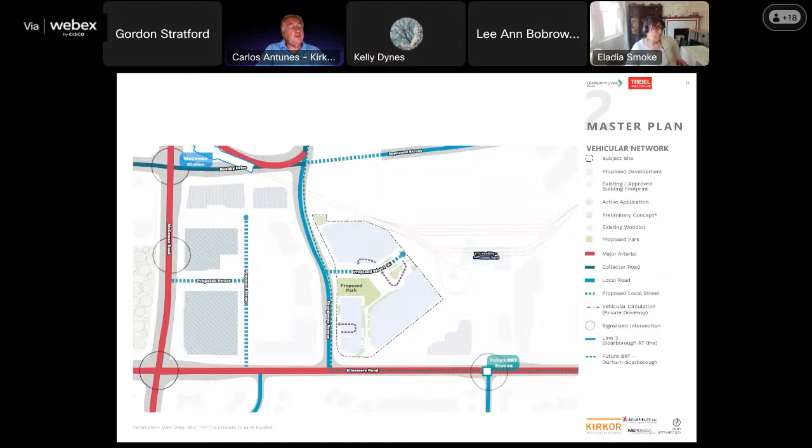The development promotes pedestrian and cycling movement through planned cycling infrastructure, internal bicycle storage areas at grade, and other site short-term bicycle spaces throughout. Active pedestrian routes are arranged to support and improve public access throughout the site, with mid-block connections, open spaces, and sidewalk zones.

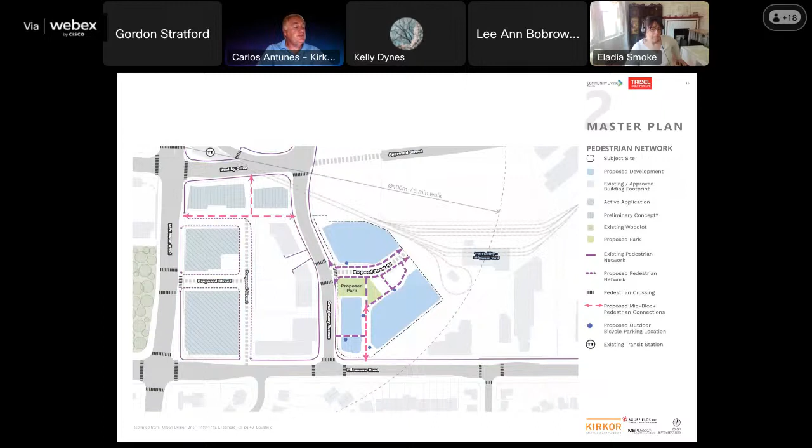A number of active uses are located at grade, including retail, community space, residential units, and amenity spaces. These uses are located throughout and adjacent to the public spaces to promote and animate the public realm. The cafe and community center are located next to the public park, and the POPS is in line with the residential units and accessible to CLTO entrances.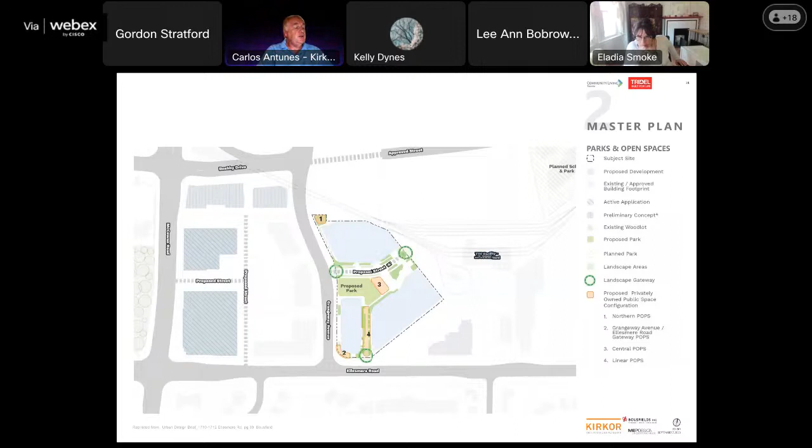The public realm will consist of a network of public and publicly accessible spaces for residents, workers, and visitors. The key elements of the public realm include 2 existing public streets, 1 new public street, 1 new public park, and 4 POPs strategically located within the site.

Our landscape plan indicating the routes throughout. Built form.

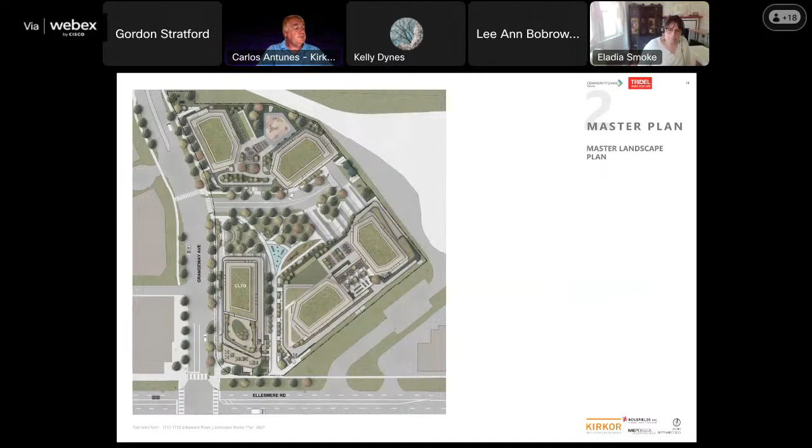The built form for the site builds upon the vision established by the Scarborough Centre secondary plan to provide an appropriate response to the emerging pattern of development in the area. The 3 blocks consist of stepping podiums with towers that are set back from the podium edges. Towers are in a point tower configuration while maintaining appropriate separation distances.

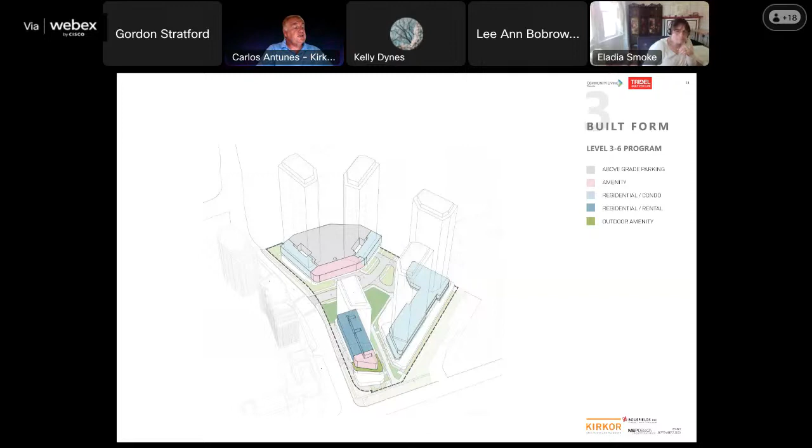Level 1 is programmed with a number of mixed-use functions that edge each podium while addressing the public realm with retail, coffee shop, community center, residences, and amenity areas. Level 2 contains office and respite facilities in the CLTO Block 3 building, while the Market building contains residences and amenity areas. Podium levels contain residential and amenity functions, as well as above-grade parking for the northerly block.

Level 7 contains extensive outdoor amenity areas and residential areas. The point towers contain the residential units.

All roofs are planted with either green roof planting areas, and amenity areas are planted to support outdoor amenity functions.

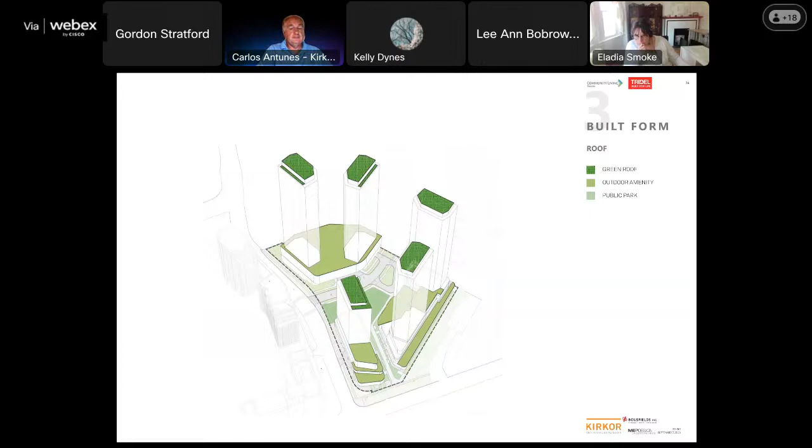Public realm: to promote a vision of inclusive and accessible design and community, three gateway areas are identified to establish a sense of welcome and orientation.

A concept of moments is emphasized throughout to animate and cultivate a sense of place.

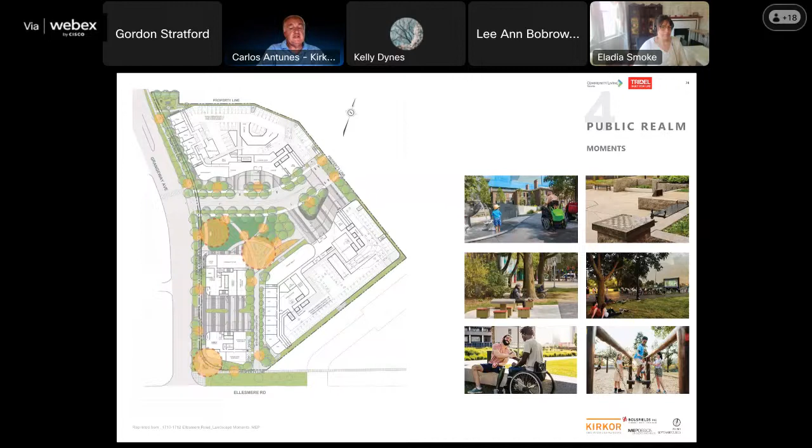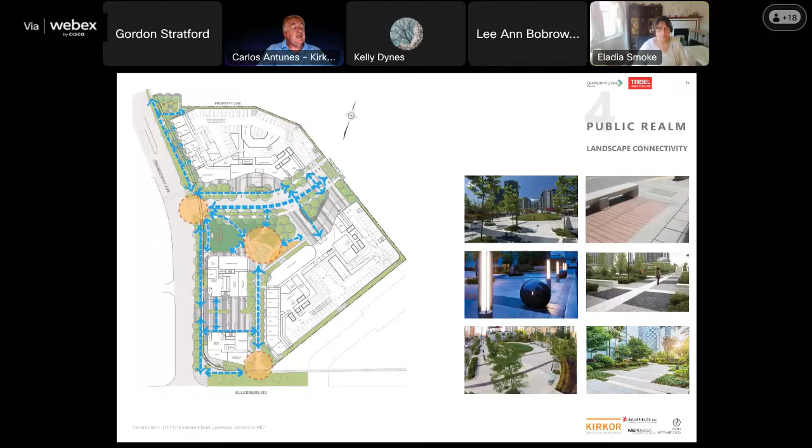Various landscape features are utilized to promote accessibility to all senses, using continuous paved markings, lighting of different intensities and scale, spaces that promote respite and activity, and markers establishing a sense of orientation for those that CLTO services and the community at large. The new Street A will function as a landscape and pedestrian-oriented boulevard.

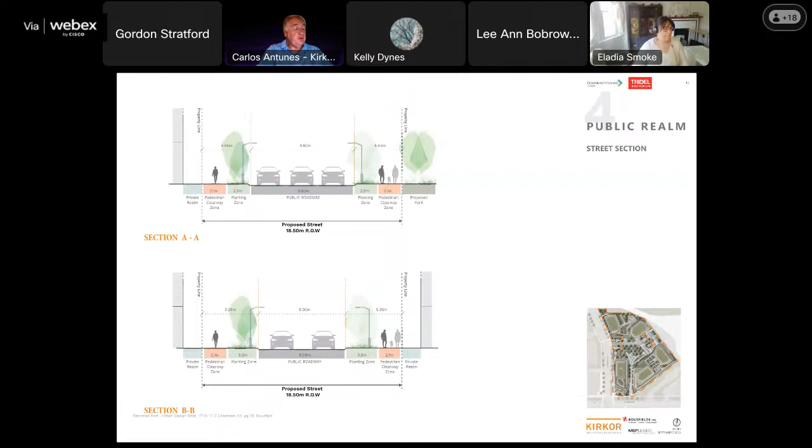The street is designed as an 18.5 meter right-of-way with 2.1 meter sidewalks, a minimum of 2.2 meters of planting area, and 8 meters of paved area.

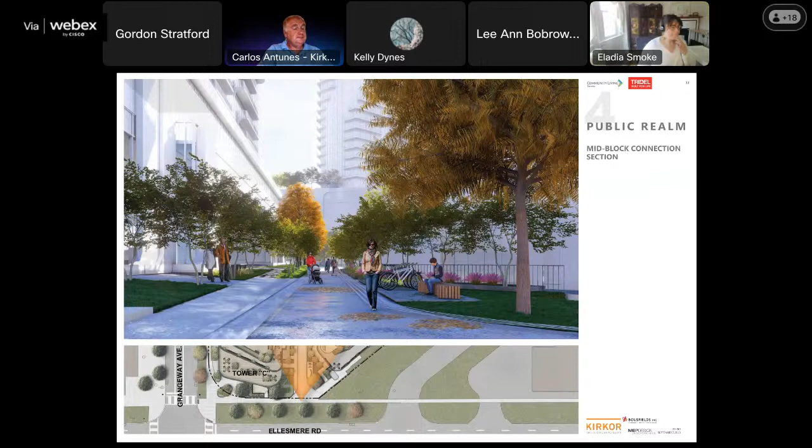The following are views of the previously described public realm. This illustrates a view northward through the POPS area. This view shows the varied function along Grangeway and the access to the CLTO building.

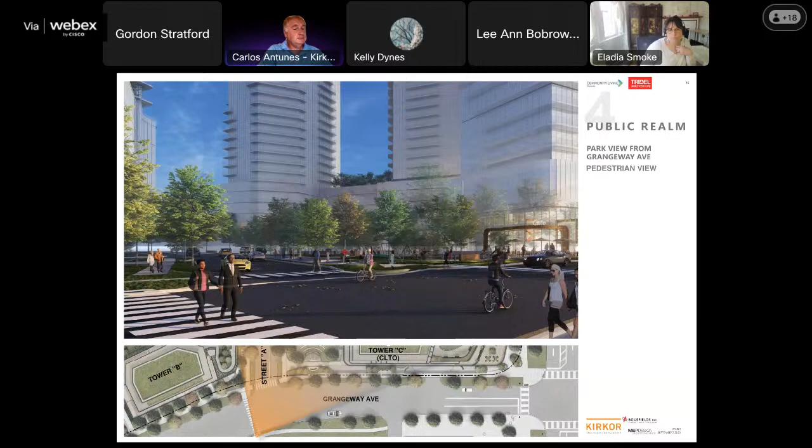The massing of the towers is in relationship to the ground-related functions.

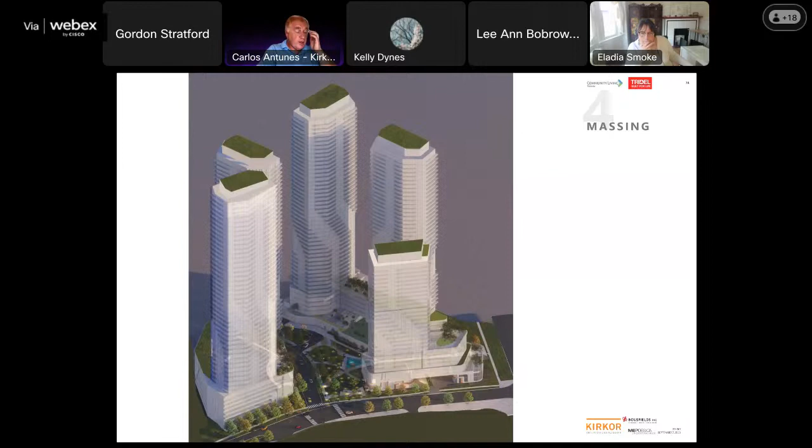As described earlier, one of the key vision statements for the site is exploring innovative and sustainable design. Tridel is a long-standing, sustainability award-winning developer that explores and implements sustainable strategies in all of its developments, and will continue this exploration, be it through meeting the requirements of TGS 4 version 1 and creating a LEED Gold project.

CLTO will also promote creating a healthy and comfortable environment while looking to achieve broader sustainability goals. With these goals, there are financial needs with increased construction and related costs that will need to be addressed by public funding. All the key goals focus on community health and benefits through the introduction of amenities and active transportation, through well-connected transit and bike pedestrian paths.

The measures to accomplish the goals will be through site development, water efficiency, energy efficiency, building materials, waste management, landscape features, bird-friendly treatment, accessibility features, and building resiliencies.

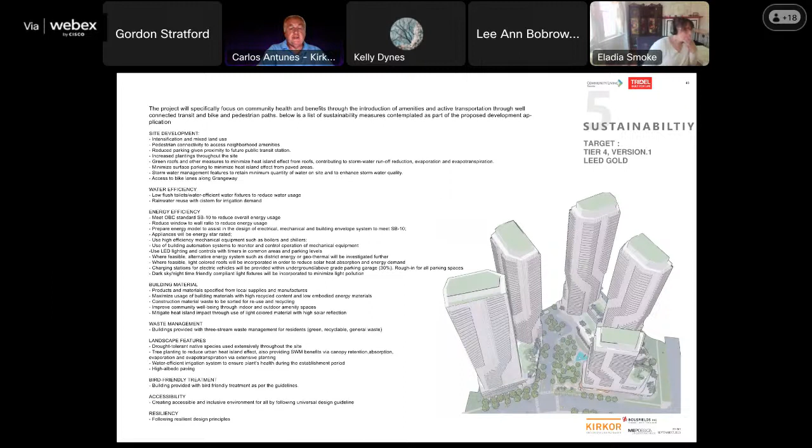Thank you for your attention, and we look forward to answering any questions you have.

Thank you very much. Great. Thank you very much, Carlos.